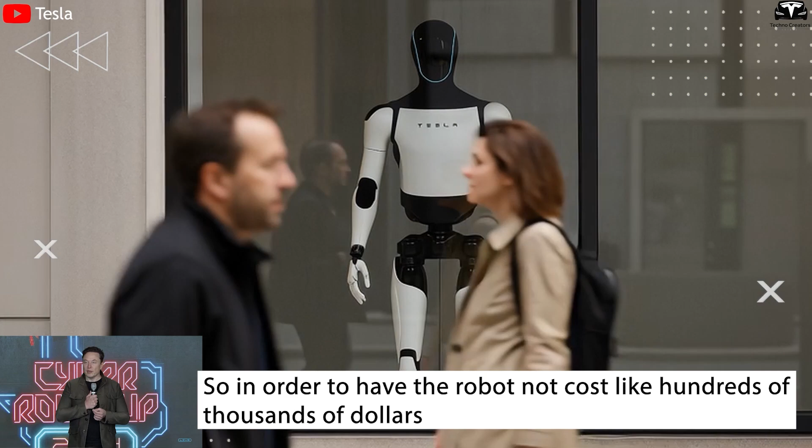So in order to have the robot not cost like hundreds of thousands of dollars, in order to make it cost like $10,000 or $20,000, Elon Musk wants Optimus to be affordable for the masses. But first, Tesla may sell it at $60,000 to limit demand and perfect production.

Once robots start building robots, the price could crash to $10,000. What impact will Tesla's pricing strategy have on the future of the robotics industry?

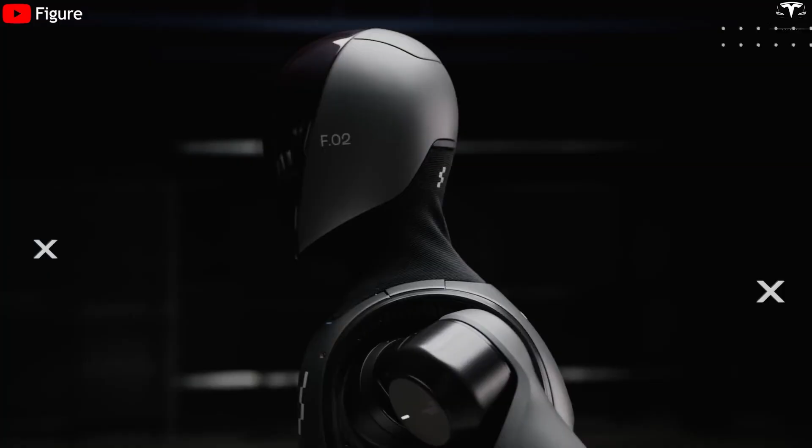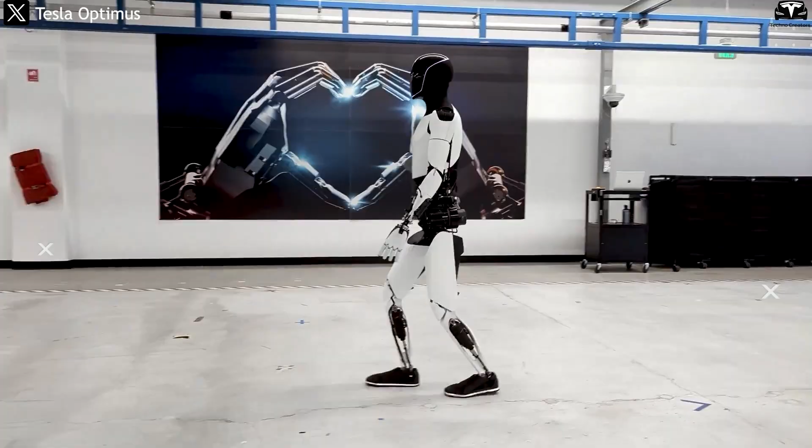How will the price of the Tesla Bot decrease as mass production scales up? Will the Tesla Bot truly become a mass market product priced under $20,000, as Elon Musk once claimed? This isn't just a futuristic question, it's a very real economic and engineering challenge.

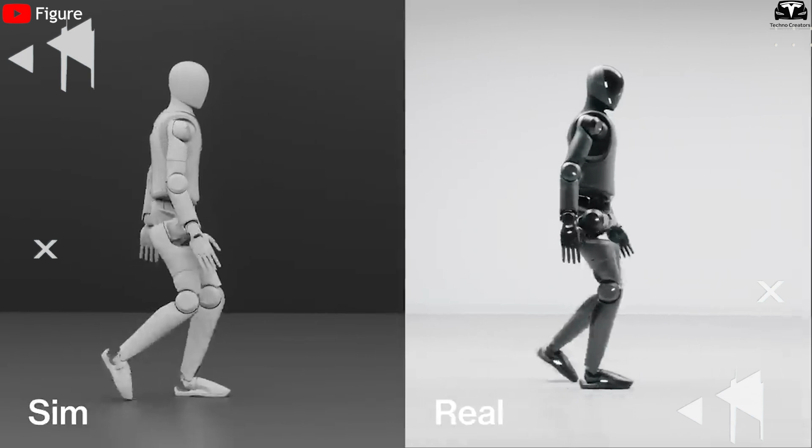In the still nascent humanoid robot industry, most current products are priced from tens to hundreds of thousands of dollars. Boston Dynamics has never commercialized the Atlas robot, while Figure AI has priced the Figure 01 between $70,000 and $100,000 for enterprise use. In such a market, Elon Musk boldly asserts that Optimus could one day cost less than a compact car, even targeting below $20,000 in the near future.

It sounds ambitious, but if we look at how Tesla approached electric cars, particularly the Model 3, and soon the Model 2, this isn't an impossible leap.

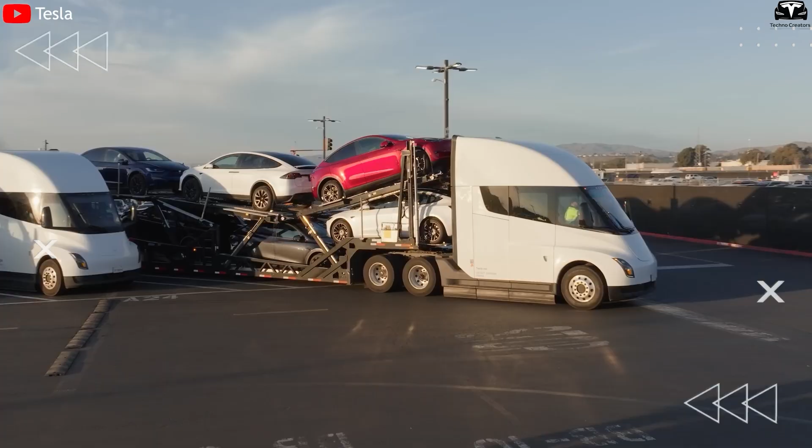At the heart of this price-cutting strategy lies one key factor: production scale. In industry, there's a well-known rule: the more you make, the less each unit costs. This is called the learning curve.

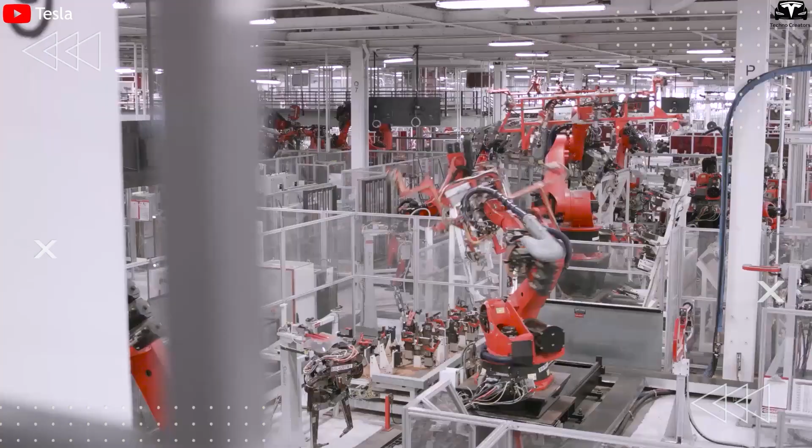Tesla applied this principle rigorously in EV manufacturing, slashing battery costs from over $150 per kilowatt-hour down to nearly $100 per kilowatt-hour within just a few years.

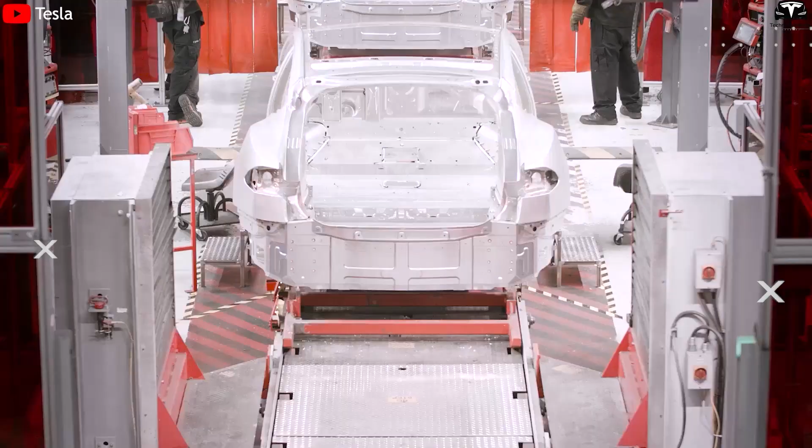For Optimus, Elon Musk has confirmed that the company is producing the first batch of 10,000 robots in the US. This is the starting point of the learning curve, a first batch that allows Tesla to build, iterate, and optimize, eventually moving toward producing 100,000 or even 1 million units annually.

So the question is, does Tesla have the tools to make that happen? The answer lies in Tesla's existing ecosystem.

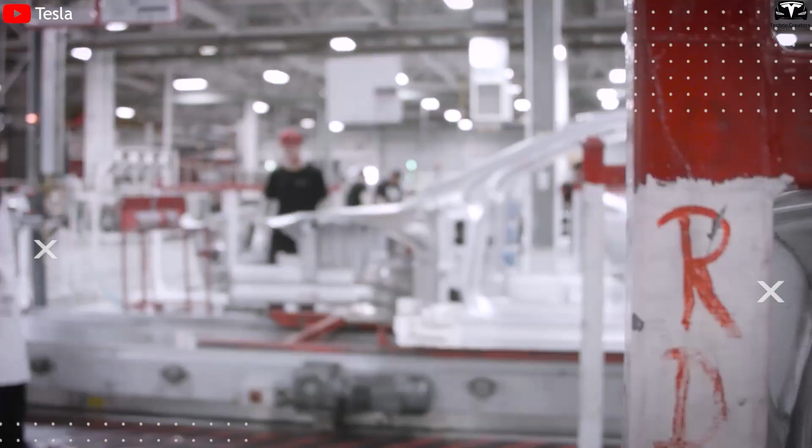Unlike other robotics startups starting from scratch, Tesla already owns a massive tech arsenal from its EV business: LFP batteries, self-driving cameras, FSD chips, electric motors, wiring systems, and even a global production network. What has already been mass-produced for cars can now be repackaged and reused in Optimus.

It's not just the hardware that's being reused. Tesla is also applying its minimalist design philosophy. As Elon Musk once said, "The best part is no part."

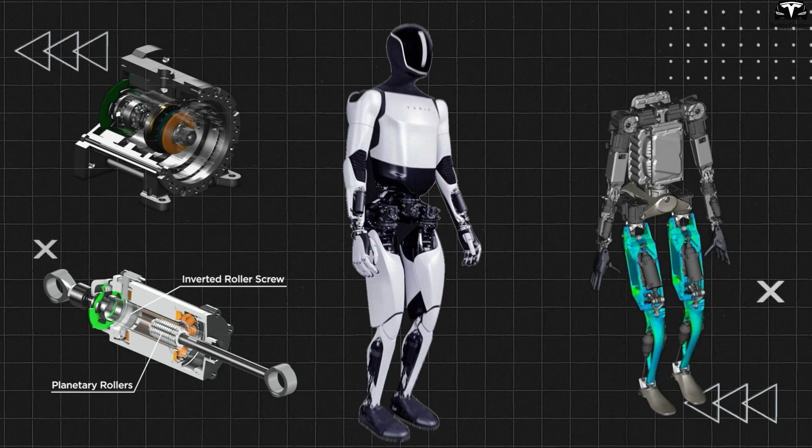Optimus Gen 3 currently weighs around 110 pounds, nearly half the weight of Boston Dynamics' Atlas, thanks to the elimination of unnecessary components, optimized actuators, and a restructured mechanical frame. A lighter robot means smaller batteries, lower energy consumption, and most importantly, easier production.

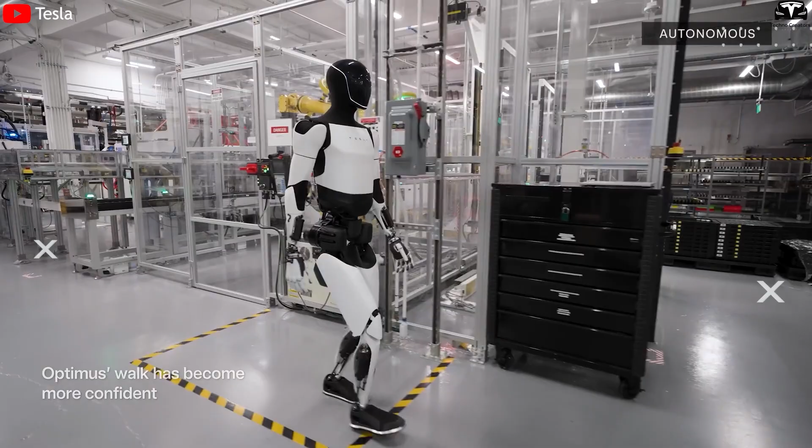Imagine if a robot needs only 100 parts instead of 300. How much faster could it be assembled? And when production speed increases, costs drop again. It's the same loop Tesla leveraged with the Model Y and GigaPress.

Even more intriguing, Tesla is going one step further: robots building robots. Musk hinted that in the future, Optimus will assist in its own assembly line, inspecting parts, packaging, even supporting human technicians. A self-replicating robot model, if successful, could generate a scaling effect no company has ever achieved.

This could explain why Tesla dares to bet on producing millions of units per year, a goal many still find hard to believe. Another smart move Tesla might apply is a subscription or leasing model.

Instead of selling a robot for a high upfront price, they could lease Optimus for a few $100s a month, recouping costs gradually while keeping production at scale. This model has already succeeded in the software industry, and if executed well, could bring Tesla Bot into ordinary households, not just large enterprises.

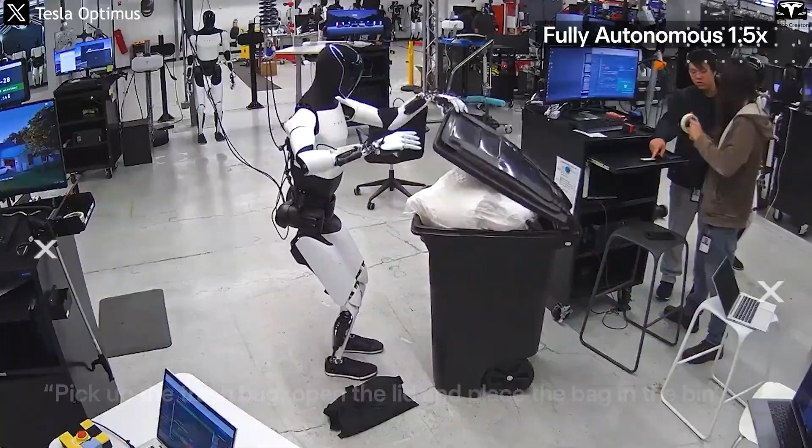That said, all of this still needs one thing: time. No one can bring the price of Optimus under $20,000 in just the first year or two. In reality, the first version of Tesla Bot will likely be sold for around $60,000, mostly to industrial and logistics partners.

But if Tesla continues expanding its production lines, refining the design, leveraging robots to build robots, and stimulating demand through leasing, then slashing the price to one third is entirely feasible.

In the end, it's not just about lowering the price, it's about scaling the solution so that this robot can serve every sector and every user, from factories and hospitals to everyday households.

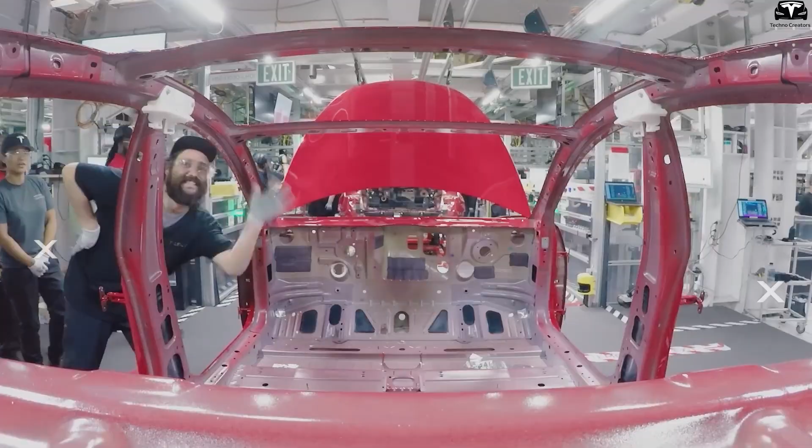And if we look back at the journey from Model S to Model 3, it's fair to say Tesla has done it once with electric cars, and now they're trying to do it again with humanoid robots.

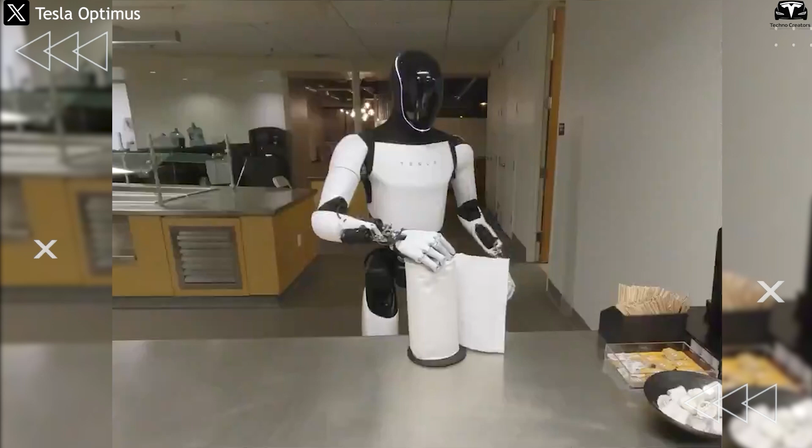Why might Tesla release multiple versions of Optimus at different price points? Tesla is fully capable of launching multiple versions tailored to different customer segments in the US, a strategic, streamlined, and highly practical move. Instead of placing all expectations on a single model, Tesla could segment the robot lineup by user needs, optimizing performance and cost for different living and working environments. This is not just a way to accelerate commercialization, it is the most viable path to making Optimus a mainstream product in the domestic market.

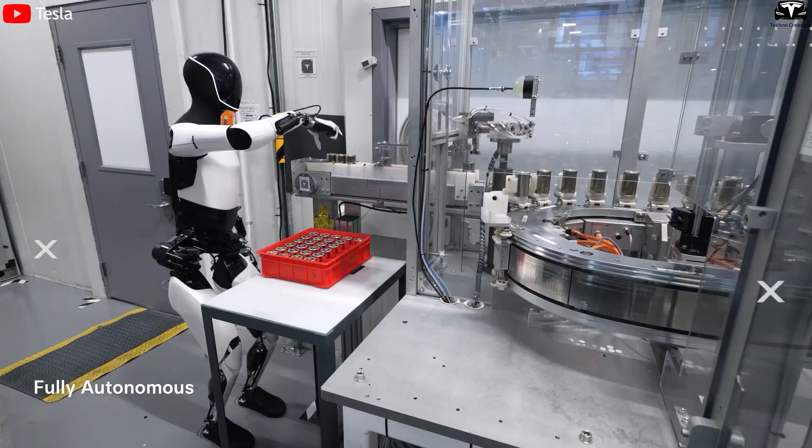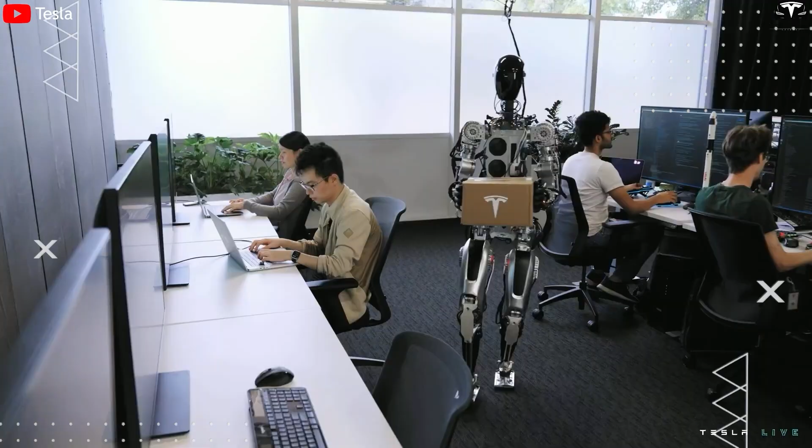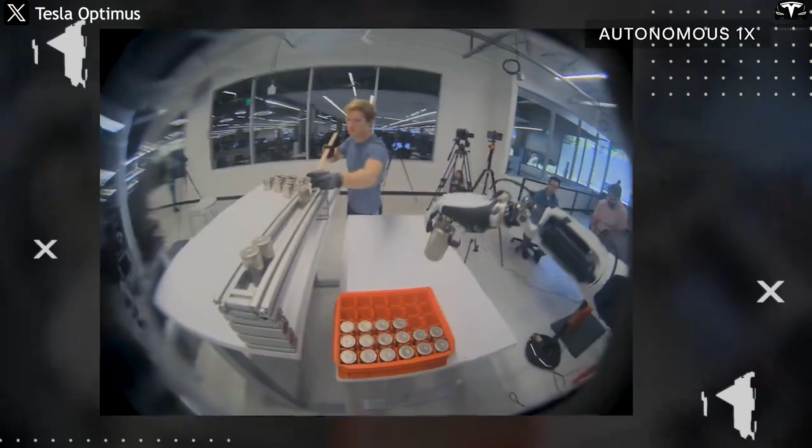At the top tier would be Optimus Pro, designed specifically for industrial zones, automated warehouses, or large-scale manufacturing facilities across states like Texas, Ohio, or the Midwest. This version would handle repetitive, labor-intensive tasks such as loading goods, assembling parts, or inspecting workflows. With the ability to lift 50 to 60 pounds per arm, a frame made of steel or high-strength alloy, robust actuators, and a battery capable of 8 hours of continuous operation, Optimus Pro is built to be an untiring robotic worker. The projected price would range from $60,000 to $75,000, a reasonable figure compared to the cost of hiring full-time labor in the US for 1 to 2 years, not including insurance or shift premiums.

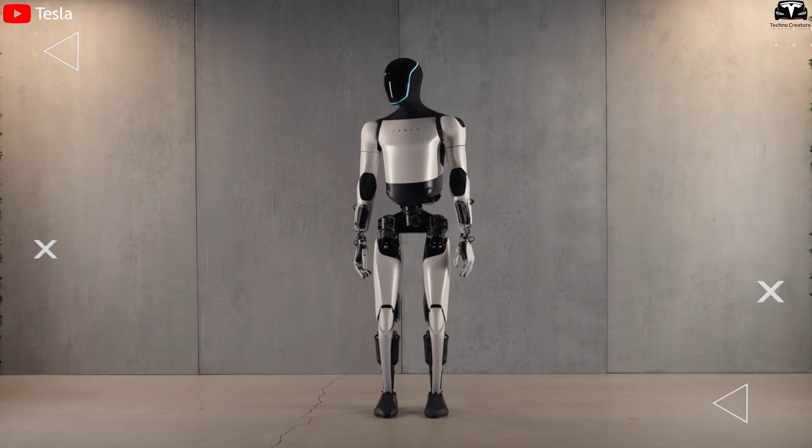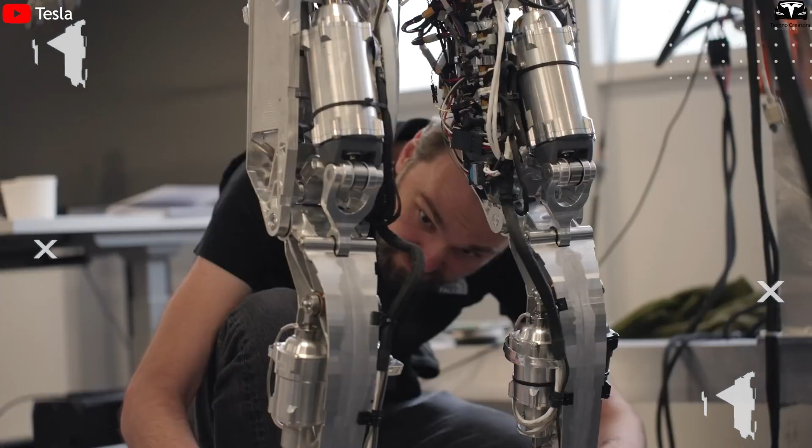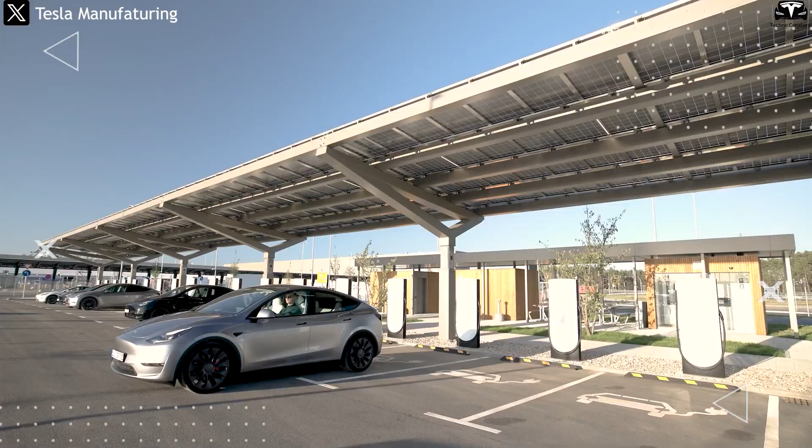On the opposite end, Optimus Lite would be a stripped-down version aimed at the general public, specifically middle-class families in the US, where priorities are convenience, safety, and affordability. This robot doesn't need to lift heavy loads or run continuously. It just needs to handle simple household tasks such as bringing water, picking up objects, carrying laundry, opening doors, or turning lights on and off. By removing high-powered motors, using lighter materials, and simplifying software, Tesla could price Optimus Lite between $15,000 and $20,000, on par with or even cheaper than a sedan in the US. Especially if Tesla applies a leasing model similar to the Model 3, users could bring home a robotic assistant for just $300 to $400 per month.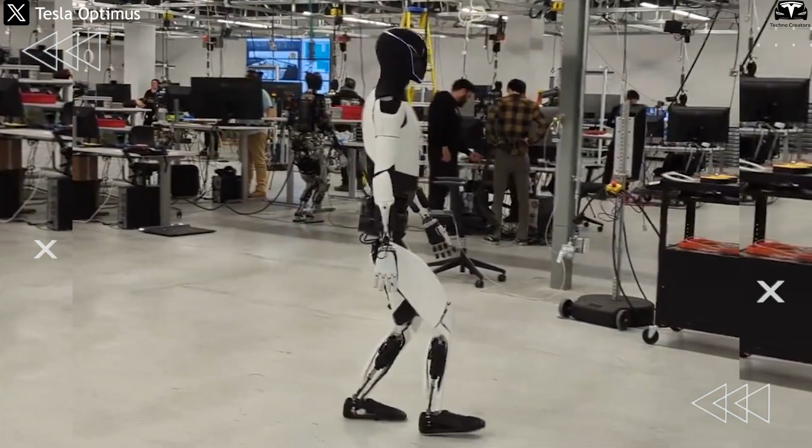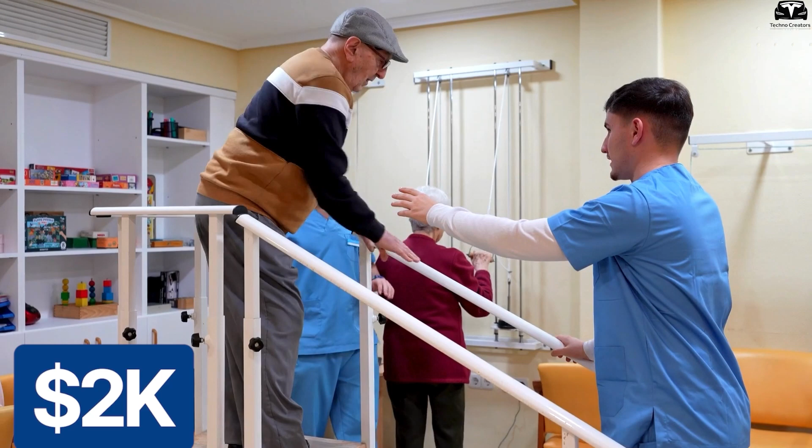However, the most crucial segment in the US may be healthcare and elder care, where labor shortages and caregiver costs continue to rise. Optimus Care could be a game-changing support solution for nursing homes, medical centers, or even private residences. Focused on safety, smooth movement, and natural English language interaction, this version could detect critical situations such as falls, extended immobility, or irregular breathing patterns. If equipped with medical sensors, emotional response AI, and a soothing voice interface, Optimus Care could retail for $25,000 to $30,000, significantly cheaper than full-time live-in care, which often exceeds $5,000 per month in states like California or New York.

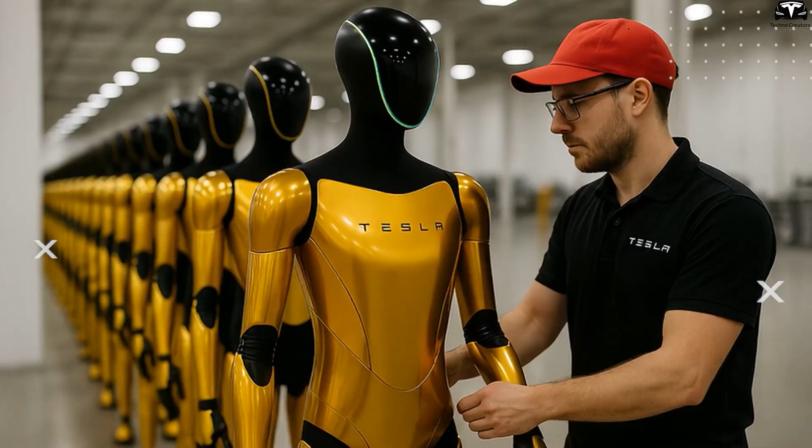Three versions with three distinct directions, yet all share the same hardware foundation, operating system, and over-the-air update capabilities. This is a competitive edge only Tesla holds. Thanks to a modular design, a single Optimus frame could be configured into Lite, Care, or Pro, depending on the customer's budget and intended use. It is a remarkably efficient way to control pricing, simplify production lines, and offer a unified user experience, much like how Apple builds a seamless ecosystem from iPhone to MacBook.

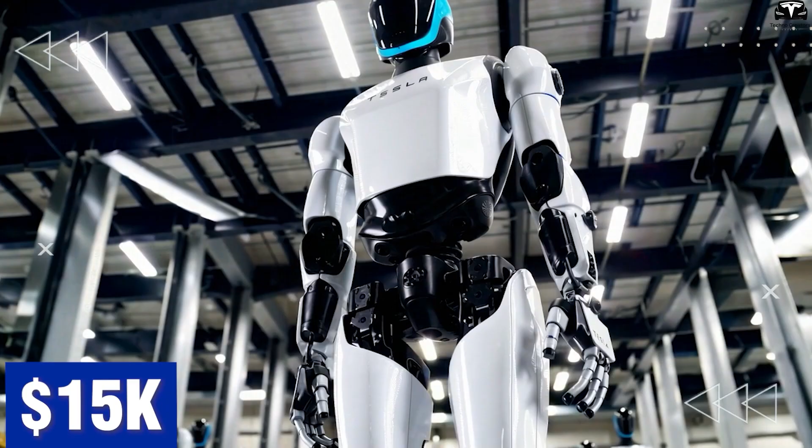Rather than dreaming of a single, all-in-one robot, Tesla may realize the robotic future through diversity and specialization. A $20,000 robot may grab headlines, but a product lineup ranging from $15,000 to $75,000, serving the right people with the right capabilities, is the true key to bringing Optimus into every home, every factory, and every medical center across the US.

How is Tesla using high initial pricing of the bot to control demand? From the very beginning, Tesla's announcement of an estimated $20,000 price tag for Optimus shocked the global tech community. However, anyone who has followed Elon Musk's product launch strategies knows that this figure isn't intended for immediate sales, but rather as a declaration of intent. In reality, Tesla is highly likely to set a high initial price, not only because production costs are still expensive, but also for clear strategic goals: to control demand, prevent overloading the production line, and most importantly, position Optimus as a premium product, much like they did with the Model S and Roadster.

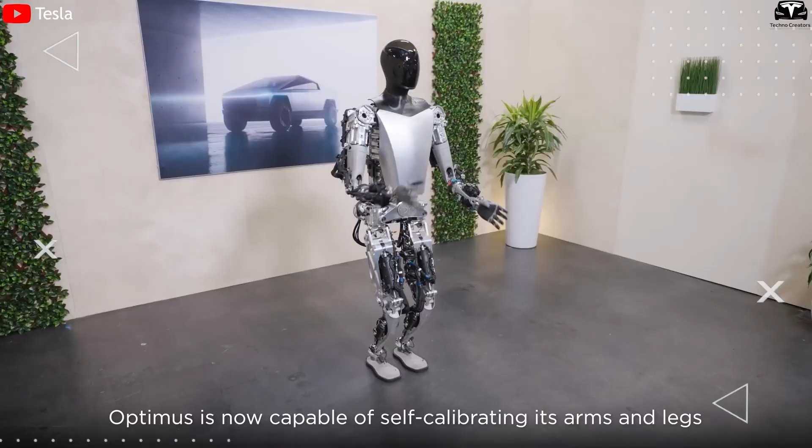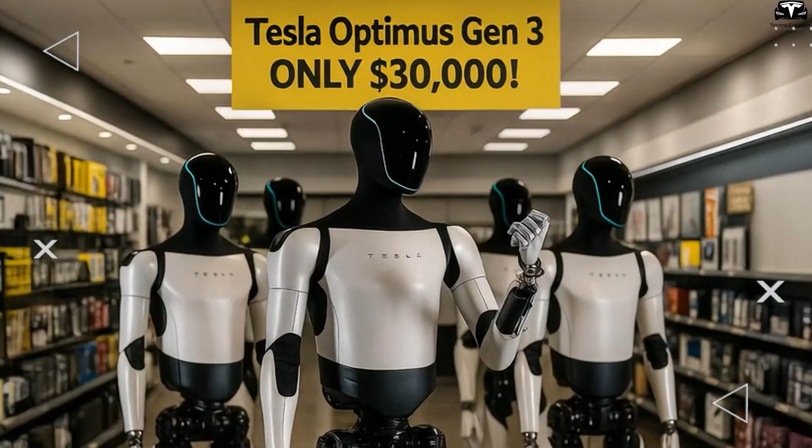Tesla is currently in the early stage of humanoid robot production, and the volume for the first year, according to Elon Musk, might only reach 10,000 units at the US factory. With such limited quantity, setting a low price would cause demand to far exceed supply, leading to order backlogs, supply chain issues, and a negative customer experience. The lesson from canceling hundreds of thousands of Cybertruck pre-orders is still fresh.

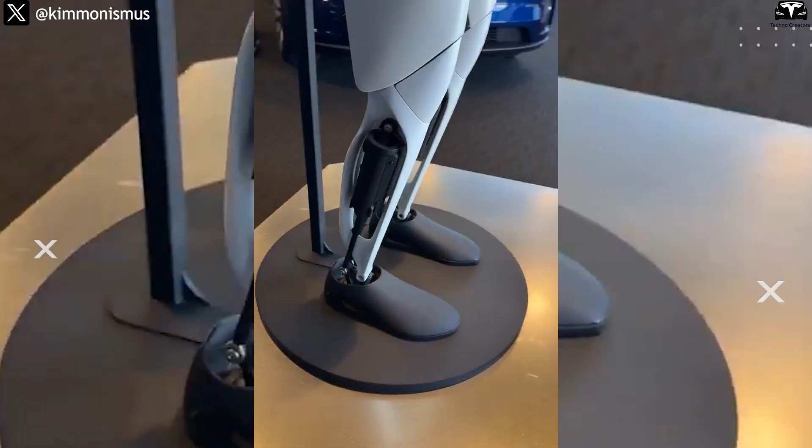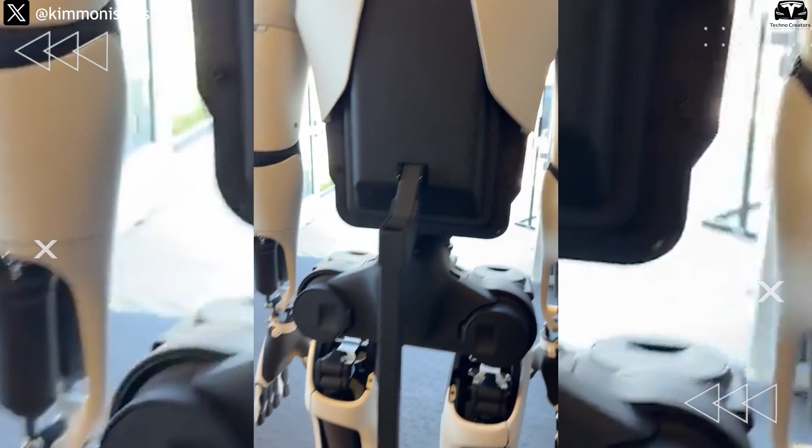Instead, Tesla may choose to price Optimus Gen 3 above $40,000 to $60,000 during the first two years, targeting strategic customers such as large enterprises, research institutions, or healthcare organizations—entities willing to pay a premium and provide the real-world data needed for Tesla to refine the software.

A high initial price also plays a key role in crafting Optimus's premium image. In the US, where brand prestige and exclusivity carry weight, a costly technology product does not deter interest, but rather reinforces the perception of being a cutting-edge pioneer. Just as the Model S paved the way for the Model 3, Optimus Gen 3, with its high price, will establish itself as the most advanced robot, available only to early adopters.

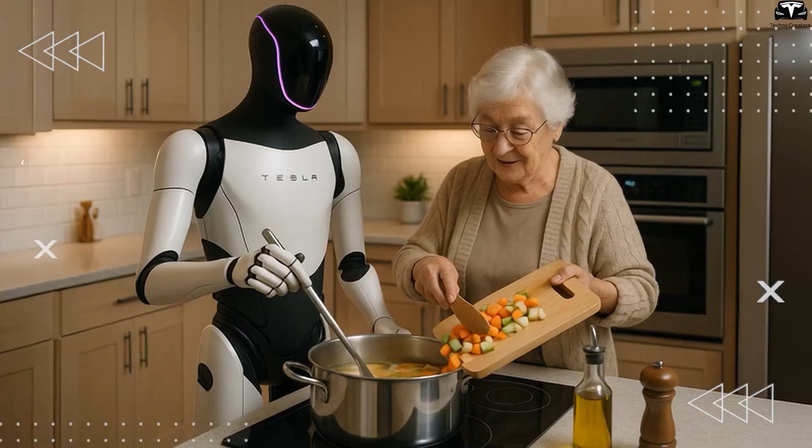The early adopter mindset in America is strong. Many will pay double to be among the first to own new technology, and Elon Musk knows this better than anyone. Furthermore, an elevated price in the initial stage allows Tesla the flexibility to gradually adjust downward over time.

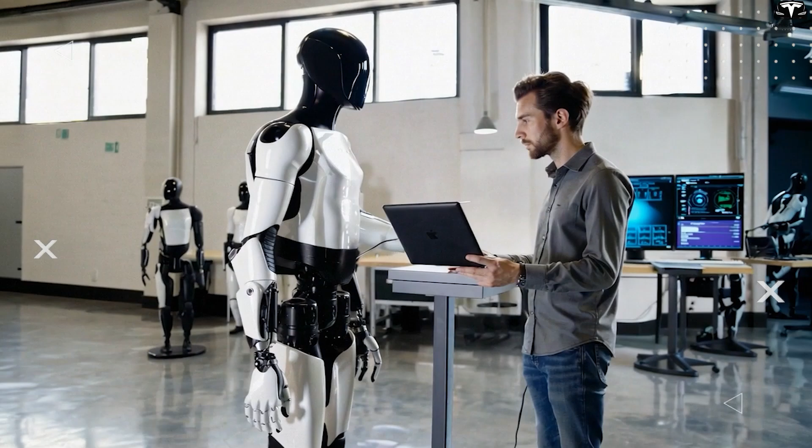As production scales up, from a few thousand to hundreds of thousands of robots per year, and unit costs fall thanks to economies of scale, Tesla could reduce the price to around $25,000 before finally reaching the officially stated $20,000 target. This is a familiar strategy threaded through Tesla's EV line. The Model S debuted at $80,000, followed by the $35,000 Model 3, and now the upcoming sub-$25,000 Model 2. It is the same technological base deployed in stages to align with actual production capacity.

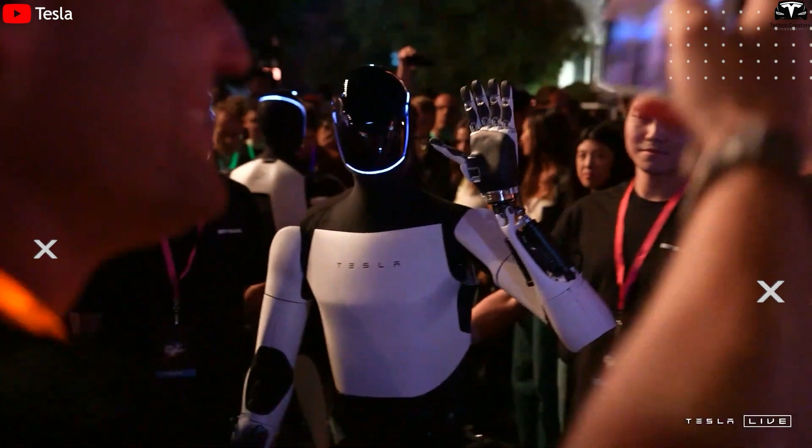On the other hand, a high entry price is also a way to test the US market's readiness for humanoid robots. Are enterprises and individuals truly willing to pay $60,000 for a mobile AI assistant, when the average yearly salary for a full-time American worker is about $50,000? If the answer is yes, even when rental options might cost $1,500 to $2,000 per month, Tesla would receive clear validation to ramp up production quickly.

If initial demand is low, they can still adjust without facing significant losses. Finally, starting with a high price helps Tesla reclaim R&D spending early—spending that has spanned many years and involved hundreds of millions of dollars in AI, robotics, mechanical design, operating systems, and in-house tooling. In the early stages, each Optimus sold may not produce large profits, but with a high price, Tesla at least avoids losses and builds the financial foundation needed to improve the next generation.

After Elon Musk's cryptic tweet just left the Tesla design studio, there will be an epic and shocking demonstration by the end of this year. Speculation has grown rapidly. Several sources suggest that the new version has been trained to perform over 500 additional tasks, ranging from manufacturing and logistics to home assistance. So, is Optimus now ready to take on real-world jobs, and if so, what might that actually look like?

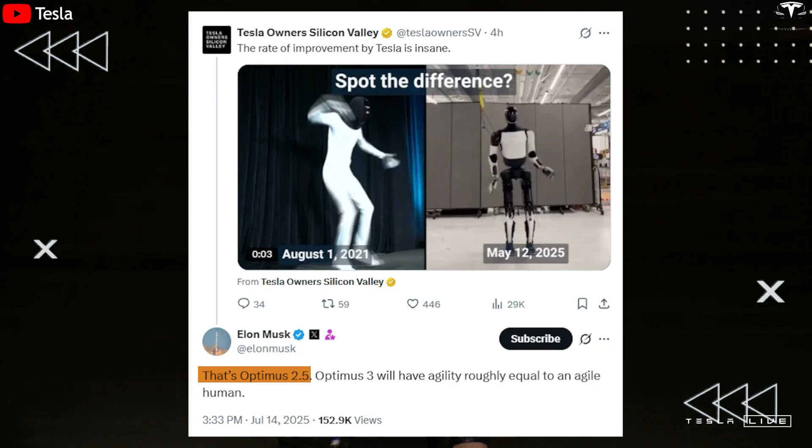How is Optimus 2.5 different from Tesla's previous robot versions? When Elon Musk declared, "That's Optimus 2.5," he wasn't merely naming a new robot version. He was signaling a clear milestone in Tesla's humanoid robot development. The use of 2.5 implies that Tesla is positioned between two major stages, having just moved past the technical testing phase of Gen 2 and nearing the commercialization target of Gen 3.

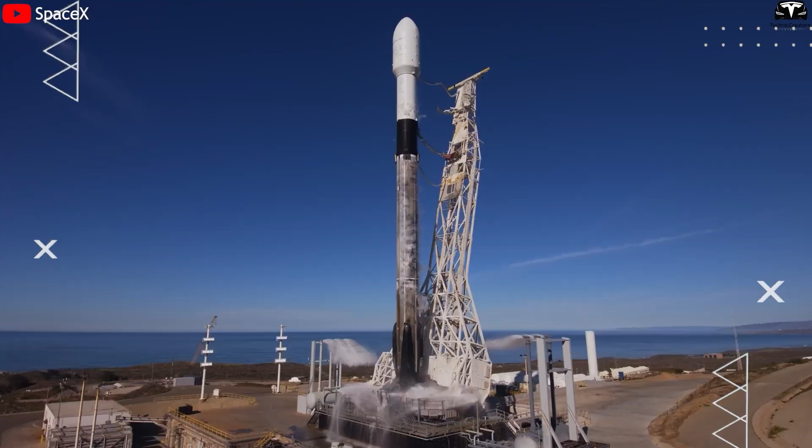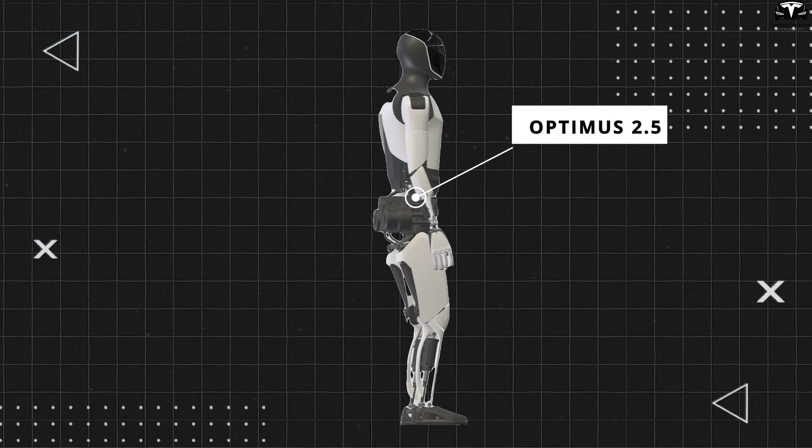In Tesla's product ecosystem, versions marked with .5 often indicate experimental intermediates that are stable enough for large-scale real-world testing. This approach was previously seen with Starship prototypes from SN5 to SN15, and temporary development phases of the Model S Plaid Plus. With Optimus 2.5, Elon Musk is implicitly confirming that Tesla has built a robot stable enough for real-world production environments, though not yet meeting the human-like benchmark he envisions for Gen 3.

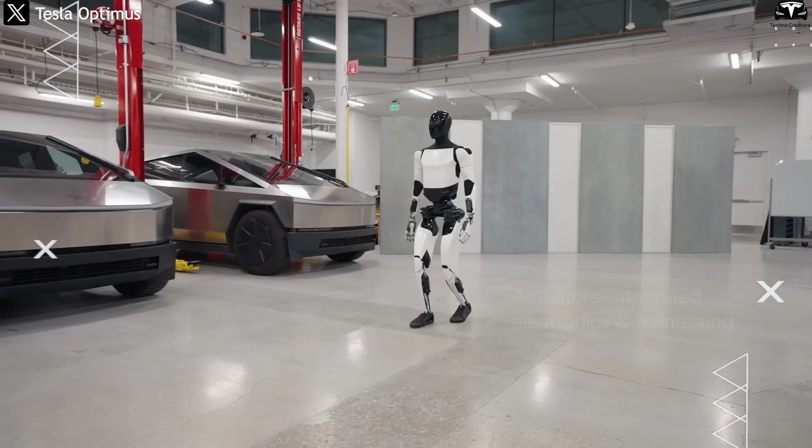Specifically, Optimus 2.5 was introduced with several impressive specifications: a weight of just 110 pounds, lighter than Figure 01 at 150 pounds, and Boston Dynamics Atlas at over 176 pounds. It includes 28 actuators entirely developed by Tesla, enabling smoother movements in joints such as arms, legs, neck, hips, and fingers. The robot can walk bipedally, maintain balance in place, rotate, step forward, and perform basic tasks like picking up small objects, sorting, and folding.

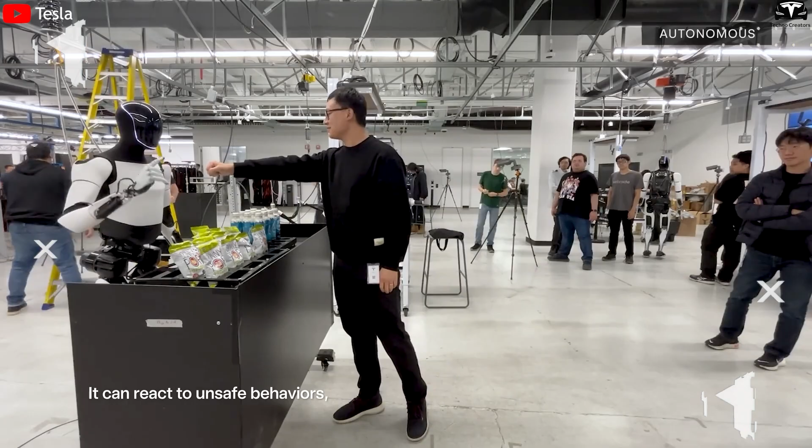Most notably, Tesla has integrated the FSD processor, originally designed for autonomous driving, into Optimus's central control system. This dramatically improves reaction speed, real-time data processing, and intelligent motion learning. The robot's response latency for some basic tasks is reported to be under 10 milliseconds, a rarity among current commercial humanoid robots. However, the decision not to label this version as Optimus Gen 3 reflects Tesla's strategic caution. According to Elon Musk, the ultimate goal is a robot with agility roughly equal to an agile human, meaning it must move, react, and adapt as flexibly as a swift person.

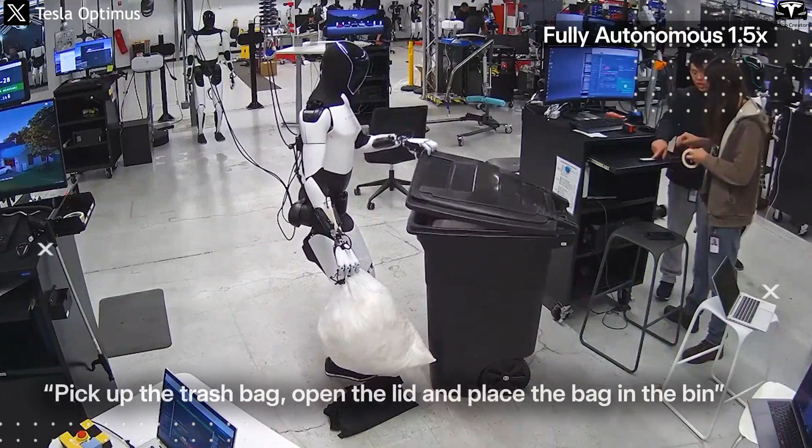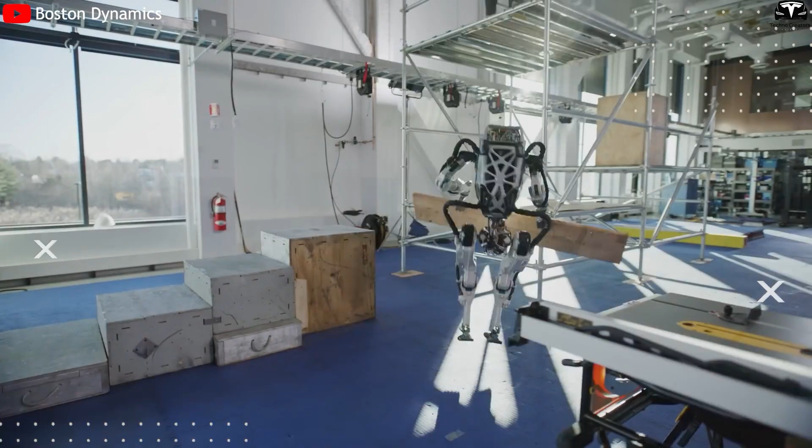Thus, pausing at Optimus 2.5 is a wise move. Rather than rushing to Gen 3 with high expectations and high risks, Tesla is opting for broad internal testing with version 2.5. This is a learn-by-doing strategy, deploying Optimus 2.5 across its factories to perform real tasks while collecting data to train the AI and refine the hardware based on real-world feedback. It also allows Tesla to establish its mass production process early.

According to official statements, the company plans to build the first 10,000 Optimus units at Giga, Texas, the same site that produces the Model Y and Cybertruck. This means Tesla is not only building robots, but also building the robot assembly lines, something rare in today's robotics industry.

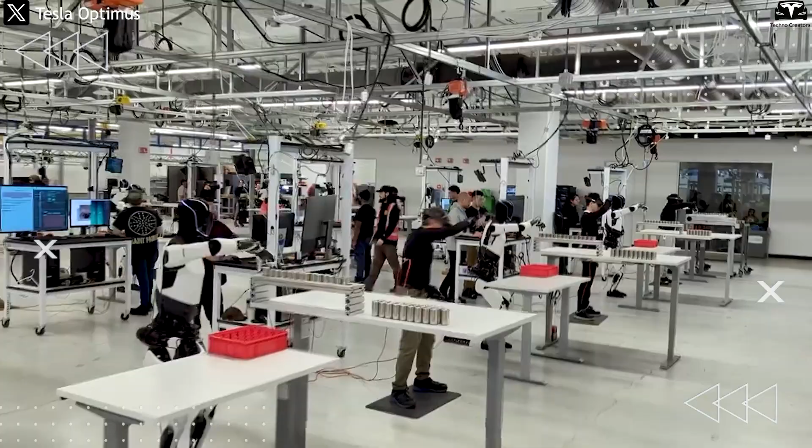In addition to technical and strategic benefits, Optimus 2.5 delivers a major communication impact. While competitors like Figure AI or 1X are still showcasing prototypes, Tesla is already deploying thousands of robots internally and preparing for large-scale production. This sends a clear message that Tesla is leading, not just in technology, but in execution speed and commercialization readiness. With full control over its supply chain, from software and AI chips to manufacturing plants, Tesla holds an unmatched advantage.

This reinforces investor confidence in the company's robot ambitions. Elon Musk has emphasized that the economic value of Optimus could surpass that of electric vehicles, since most jobs globally are still manual labor, an area robots could largely replace if designed to be intelligent, affordable, and durable enough.

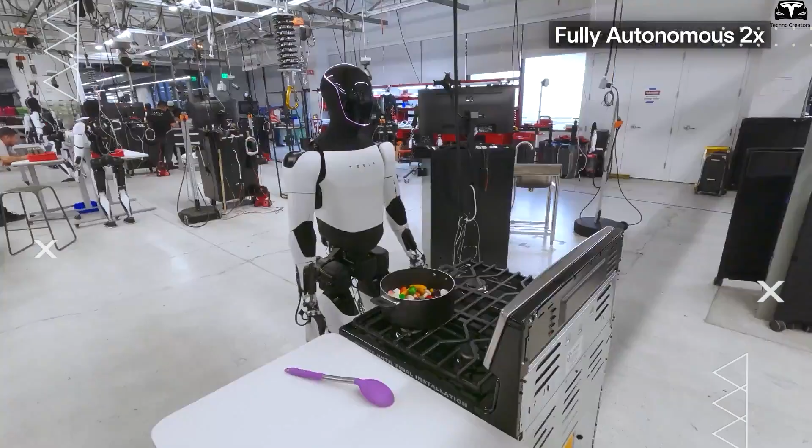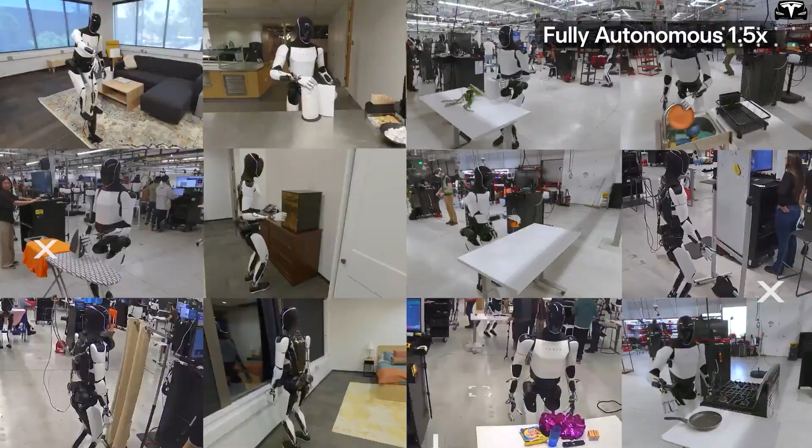In summary, Optimus 2.5 represents a pivotal upgrade, not just in technology but in deployment strategy. It is the bridge between R&D and large-scale production. Through real-world testing, AI training with real data, and simultaneous factory build-out, Tesla is laying a solid foundation for Gen 3, where humanoid robots will not only move like real humans, but also be ready for market launch at a shocking price point under $20,000.

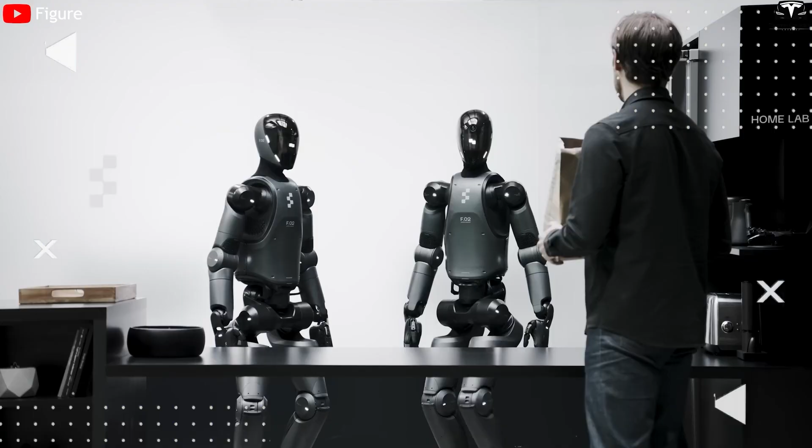As the entire humanoid robot industry still struggles with prototypes and high costs, Optimus 2.5 positions Tesla as the front-runner in the next-generation automation revolution.

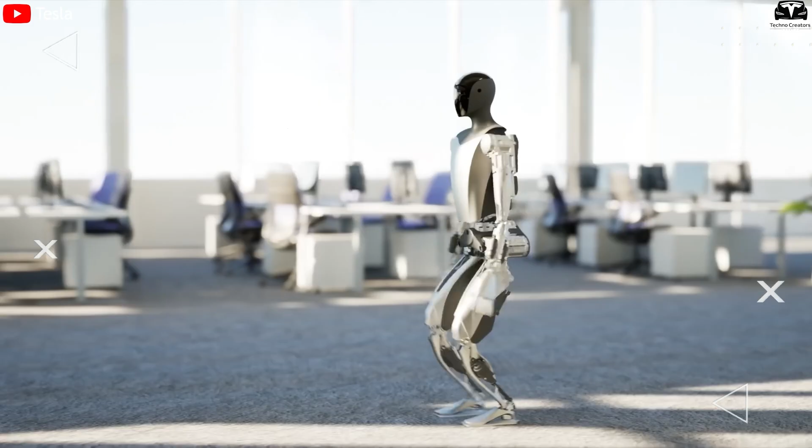By deliberately emphasizing the word agile instead of strong or intelligent, Musk signaled that Tesla has moved past the stage of focusing solely on mechanical strength and is now tackling a far more complex challenge, combining speed, precision, flexibility, and stability into a single robotic system.

Agility in robotics is not merely the ability to perform fast movements. It requires the ability to predict the next motion, shift body posture in an instant, and react to unpredictable environments. In the robotics world, this represents one of the highest hurdles.

For example, when a person suddenly encounters a slippery surface or an obstacle ahead, the brain processes a flood of sensory inputs, balance, pressure, traction, and immediately decides how to adjust, lean the body, lengthen the stride, twist the waist, or bend the knees. All of this happens within a few hundred milliseconds. A robot aiming for similar agility must have high-resolution real-time perception, powerful neural processing to interpret the situation instantly.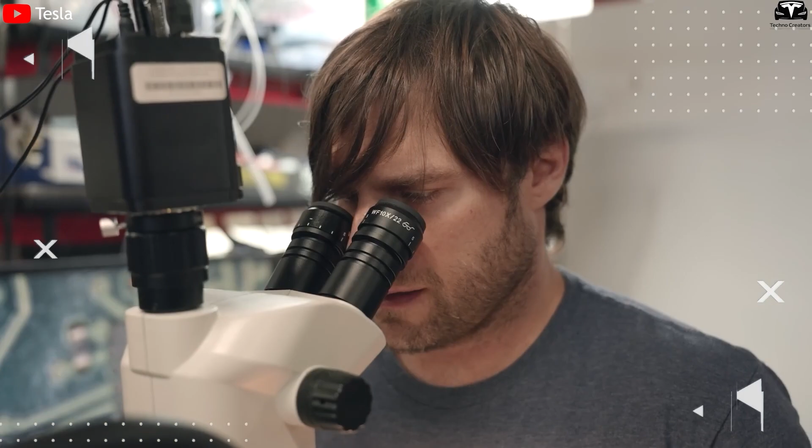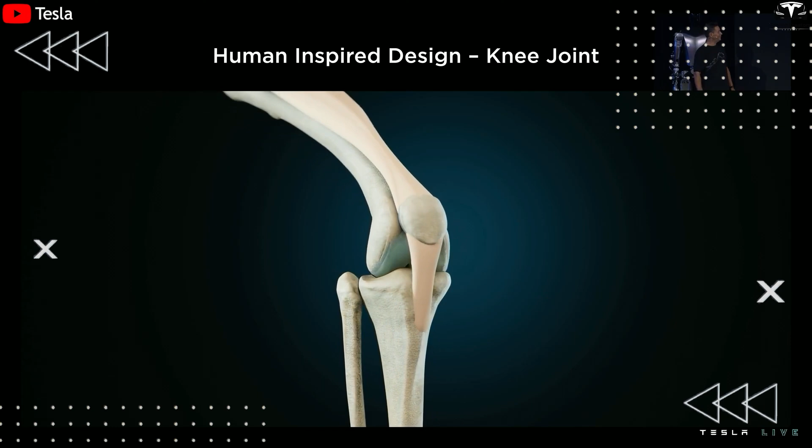From a technical standpoint, achieving this level of agility demands seamless integration of three core systems: force, vision, and inertial sensors. Extremely fast deep learning processors and actuators capable of immediate response across wide ranges of motion. On a humanoid robot, especially a biped like Optimus, this challenge becomes even more intense, as everything must operate within limited space, energy, and material durability.

For a robot to sidestep a falling object, step back when nudged, or dodge when someone walks in front of it, it needs an AI system capable of real-time motion prediction, trained on millions of real-world scenarios.

This also means Gen 3 can't simply be assembled and run. It must be equipped with a deeply trained AI system at a level far beyond what autonomous vehicles require. Tesla holds a unique advantage in this field. Its massive AI infrastructure already supports autopilot and FSD across millions of cars.

The Dojo supercomputer, Tesla's in-house design, is also being used to train the neural networks powering the Optimus robot. The major difference is that instead of merely learning to detect lane markings or nearby cars, a humanoid robot must learn millions of human poses, understand how to behave in physical interactions, and adjust its applied force in changing environments such as slippery floors, sloped surfaces, or extreme temperatures. This is why Tesla continues to let its robots practice in real-world settings, something no other robotics company in the world is currently doing at this scale.

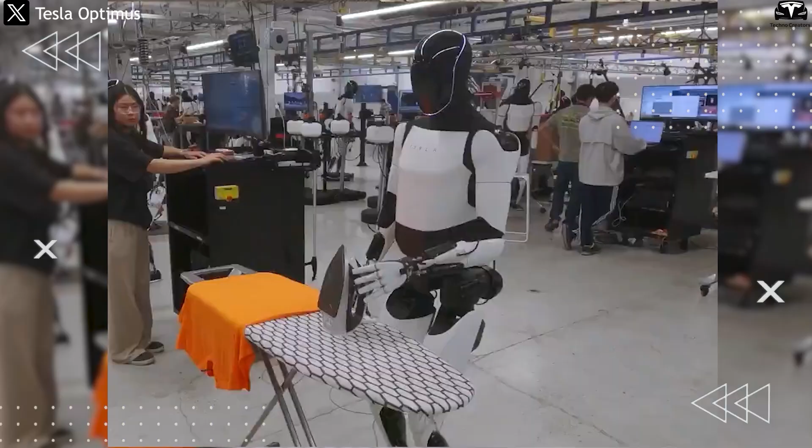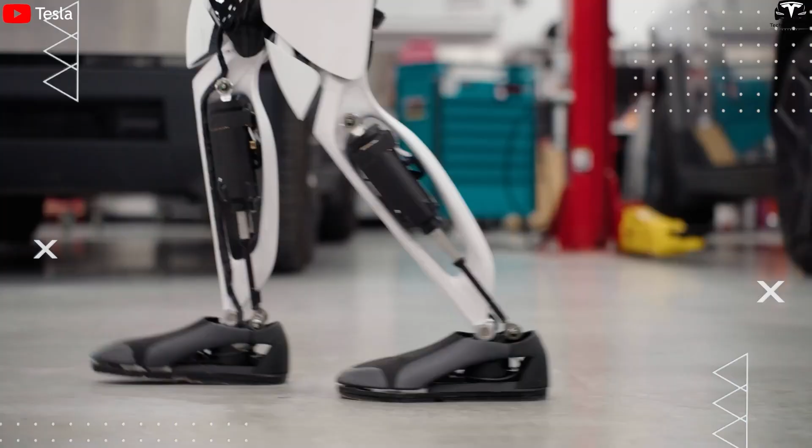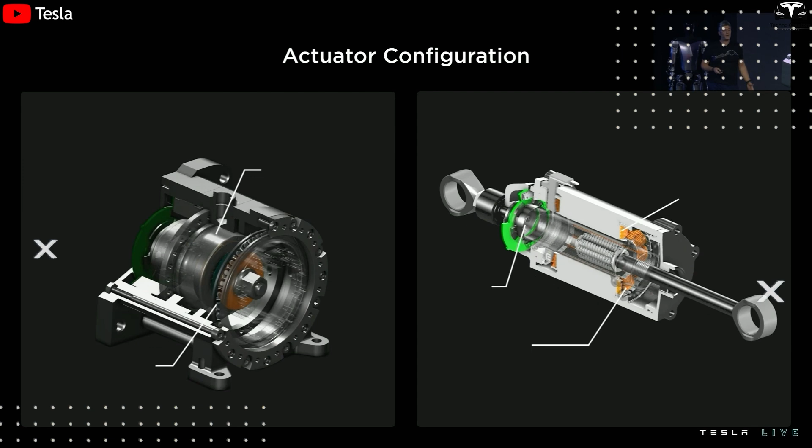Beyond software, achieving human-like agility also requires hardware breakthroughs. While the current Optimus Gen 2.5 still relies on a mechanical skeleton with limited feedback and some joints that have speed constraints, Gen 3 may adopt new materials with higher elasticity or actuators with real-time torque sensing. Tesla has previously stated that it is developing a fully Tesla-designed actuator system and continues to improve it to reduce weight, increase responsiveness, and enhance joint precision. These advancements are critical if Optimus is to enter fields like healthcare, elderly assistance, high-speed manufacturing, or any human-facing environment, where even small mistakes can have serious consequences.

Another crucial factor is that agility does not come from hardware alone, but also from coordination among body parts. An agile person knows how to rotate using their waist, shift their center of gravity, and redistribute body weight optimally while running, jumping, or changing direction. This requires continuous multi-axis coordination, a massive challenge for bipedal robots. Optimus Gen 3 must learn these movement patterns like an athlete, not only maintaining balance but optimizing posture and kinetic energy through every motion phase.

If successful, Tesla won't just create a robot that can work, but a humanoid capable of integrating seamlessly into human environments without appearing robotic, stiff, or awkward. Most importantly, the goal of agility equal to an agile human represents Tesla's long-term strategic vision, putting robots into spaces where only humans have previously been effective: hospitals, nursing homes, restaurants, hotels, and even private homes. It signals that Tesla isn't just building robots for heavy industry, but aims to create multi-purpose, socially capable robots that operate long-term in human-centered settings.

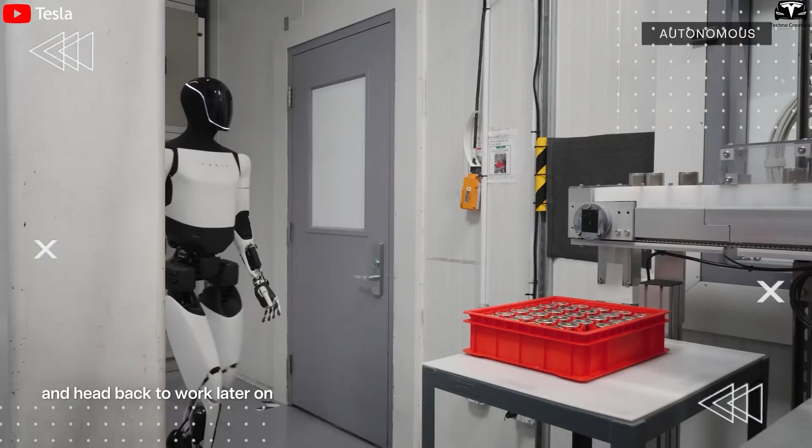Once Optimus can move as flexibly as a person, it will overcome the biggest barrier humanoid robots have ever faced: the ability to interact naturally with unstructured environments where there are no predefined scripts, no lane markings, and no physical guides like in factories or parking lots. Tesla's ambition to bring Optimus Gen 3 into the real world isn't just about AI or robotics. It's also a manufacturing challenge on an unprecedented scale.

Elon Musk has confirmed that production of Optimus is already underway at Giga Texas, with a plan to build the first 10,000 units. Unlike traditional robotics companies that treat each robot as a handcrafted prototype, Tesla approaches robot production like it does with electric vehicles: full vertical integration, heavy automation, and continuous design iteration. One of the biggest breakthroughs in Tesla's manufacturing strategy is its ability to co-develop the product and the production line simultaneously. As Optimus 2.5 is being deployed internally in Tesla's factories, engineers are collecting real-world usage data, optimizing hardware based on failures and feedback, and refining the assembly process in parallel.

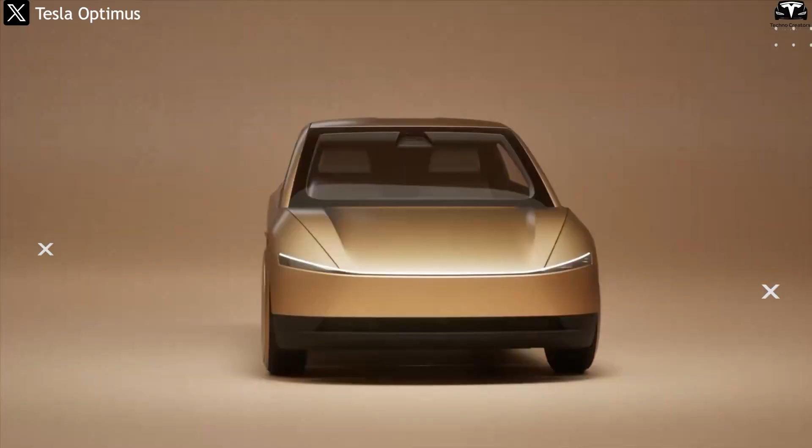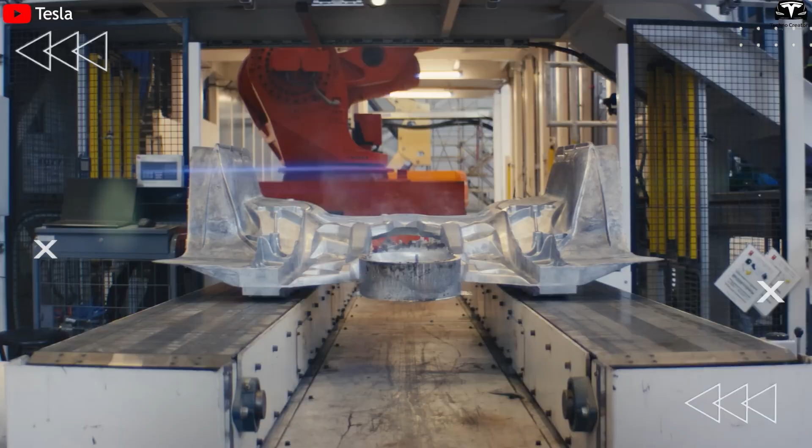This build-while-learning approach significantly shortens development cycles and ensures that when Gen 3 is ready, Tesla already has a proven, scalable production line. The use of shared components between Optimus and Tesla's EVs, such as actuators, sensors, and the FSD chip, also drastically reduces part complexity and cost. Combined with Tesla's expertise in gigacasting and large-scale battery module production, this allows the robot to be built at a fraction of the cost typical in the robotics industry. Musk's bold claim of a sub-$20,000 price point for Optimus hinges on this exact advantage.

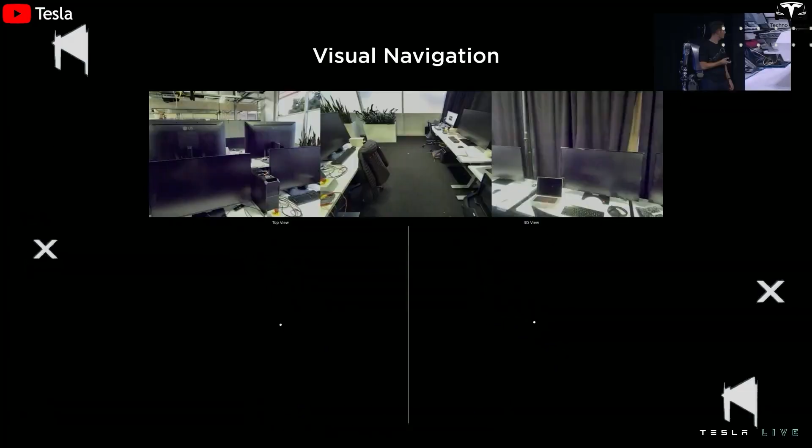Moreover, Tesla is leveraging its experience with software-defined manufacturing, where firmware updates and robot calibration happen digitally on the factory floor. This makes each unit smarter over time, even post-deployment. In short, Tesla isn't just building a robot, it's building a robot factory, which may ultimately become its most disruptive innovation.